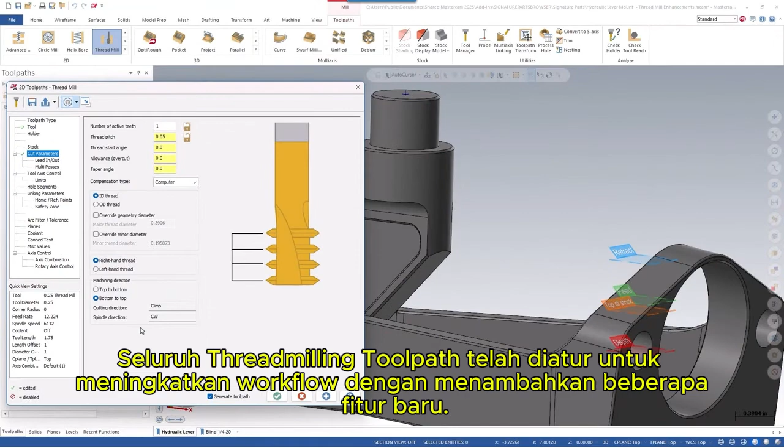Users have been asking for more advanced control over the lead moves for Threadmill, so starting in Mastercam 2025, it's received numerous updates. The entire thread milling toolpath has been gone through and organized to improve the workflow along with adding some new features.

Thread mills are versatile in which the same tool can be used on both external threads, internal threads, and multiple diameter holes and bore sizes. Thread mills come in a variety of different sizes and pitches with a single or multiple thread profile. Let's create a thread mill operation on an ID feature.

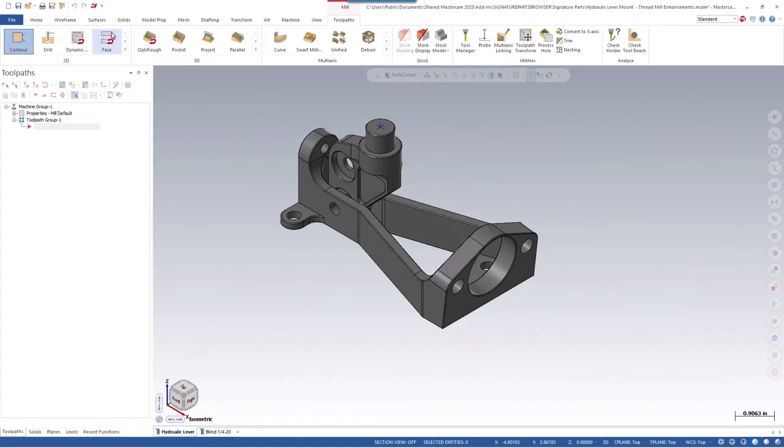So let's go through and create a new thread milling operation, and we'll go down and select this ID hole here, and we'll click the green check. We'll choose tool 1, 1/4 inch thread mill, and here on this page we can see a new checkbox, the tool edge feed rate.

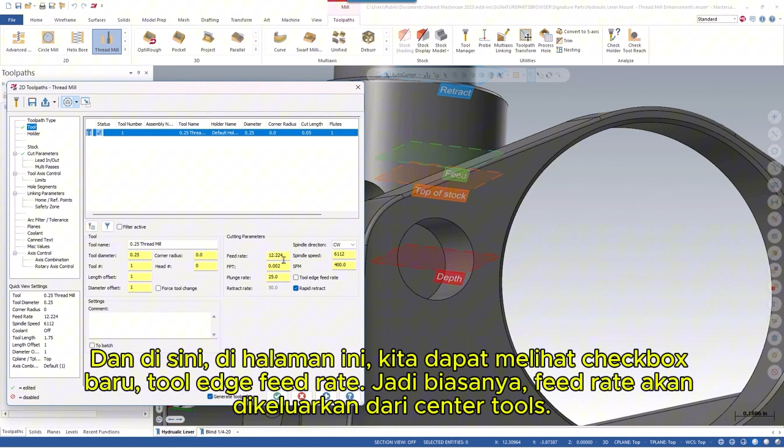So normally the feed rate would be output from the center of the tool, and you'd have to use a formula to calculate what the feed rate is where the contact point of the tool is to your geometry. Now we added this checkbox to automatically do this for you, so when you output your code, your actual feed rate would be reflecting your contact point feed rate.

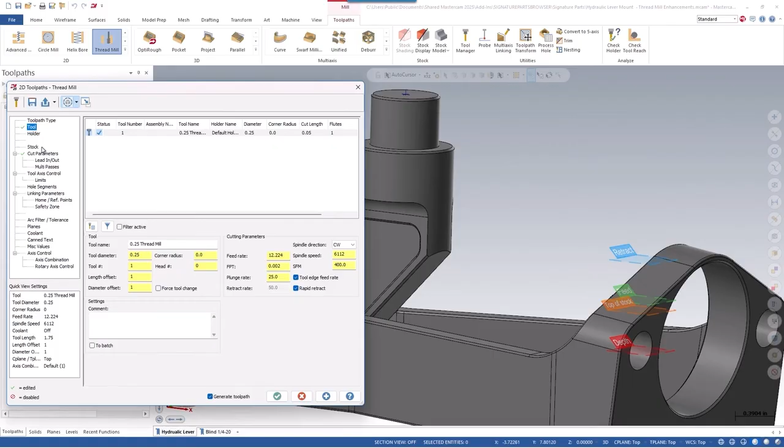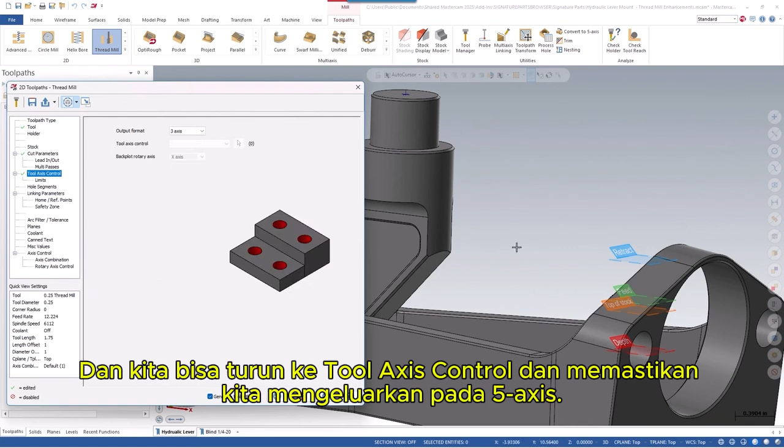So let's go to the cut parameters page. We'll make sure we're an ID thread, and we'll machine bottom to top. And here we added, just for visibility, the spindle direction and cutting direction, so you can quickly confirm that you're going the right direction. And we can go down to tool axis control and make sure we're outputting on 5 axis. And let's just turn off graphical planes for visibility.

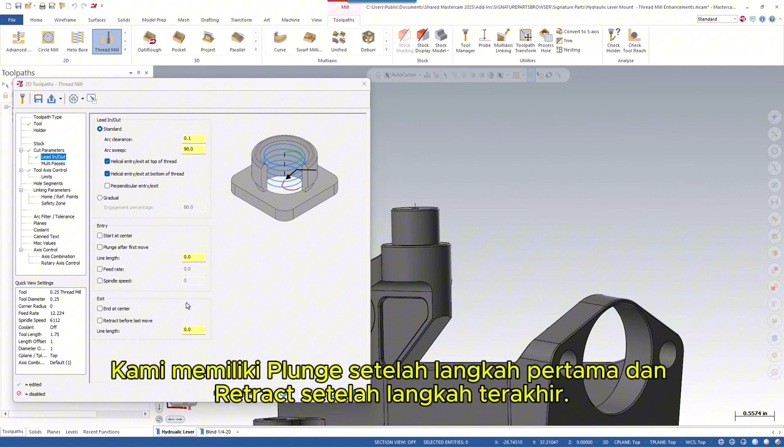And we'll go to the lead in and lead out page. This is where most of the changes are. So we can turn off start and end at center, and it unlocks a couple things. We have plunge after first move and retract after last move. Now, if you notice, the entry and exit are now separated, so you can have your separate controls for both of those conditions. And line length, between line length, we can add some distance here, so 0.1 for both.

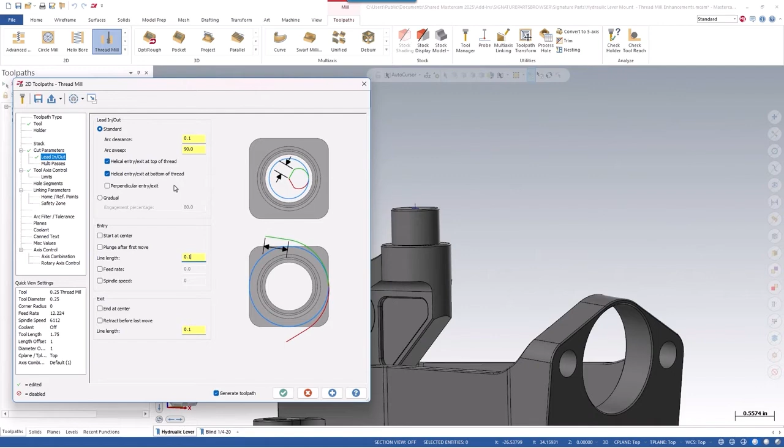What this is doing is adding a linear move that allows us to turn on and off your cutter comp before your circular interpolation. So in certain cases in ID threads where you don't have that perpendicular entry or exit to turn that on and off, we now have this motion that will start and end outside of your actual hole. And we can click the apply button, and we can turn plunge and retract after and before the last move, and we see that we have this linear move here outside of your hole.

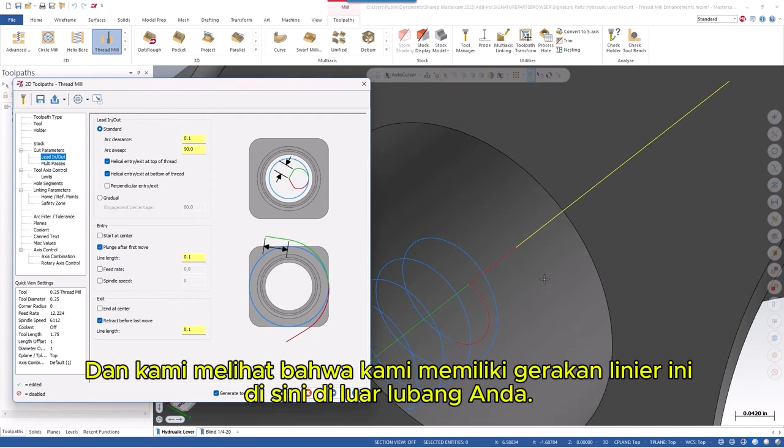We also added spindle speed and feed rate overrides on your entry to allow users to really control their engagement into material, so the tool has a better chip load when it's ramping into material.

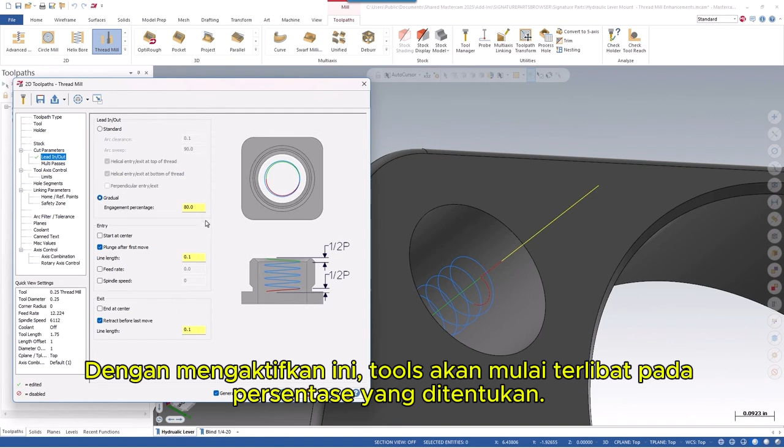So the biggest change here is your gradual lead in and lead out. With this turned on, the tool will start engaging at the percentage specified, and it will go to your full engagement within the first half pitch or 180 degrees. And then the same thing applies on the lead out. It will disengage over that half pitch. So this gradual engagement prevents that sharp engagement that can lead to more tool wear on your harder materials.

So these new controls for Mastercam's thread milling toolpath are a great improvement for toolpath efficiency. Tool wear will be reduced, and cutting conditions will more closely match the parameters specified by the tool manufacturer.